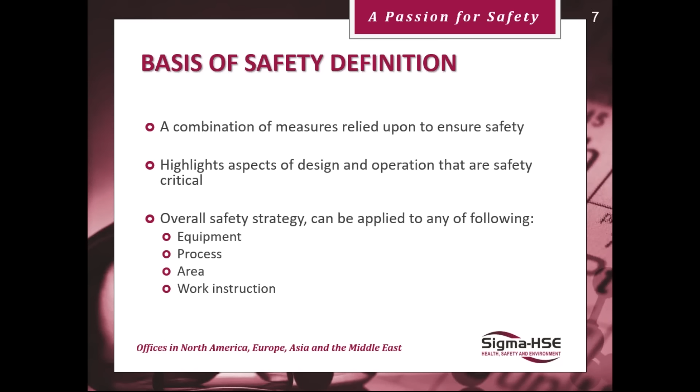The area where you're working, is it a hazardous area? It will be if you're dealing with flammable materials. We have to look at what type of area it is. Is it a zone 0, zone 1, or zone 2, which are designated in the EU? Do you provide work instruction? In other words, do you have SOPs, etc., for your workers so they thoroughly understand what the process is about?

So in order to build our basis of safety, it is necessary to have the following information available. You must have information on the equipment specifications. How fast does the machinery go? What sort of temperature does it reach? What is it made of?

Operating procedures, as I said before, are very important to ensure that staff understand what they're doing with the process. Hazardous area classification - is it a very high risk area, such as a zone 0 or zone 20, or is it less dangerous, a zone 2 or 22?

What sort of maintenance procedures do you have in place? Do you wait for something to go bang, or do you have preventative maintenance in place to ensure the system works to a high level at all times?

What type of materials are being handled? You'll probably have materials which you regard as not being particularly dangerous, and you may have other materials which you look at and say these are very toxic, for instance. But some of these materials that are not particularly dangerous from the point of human health may be dangerous from fire explosions, such as sugar, flour, etc., food materials.

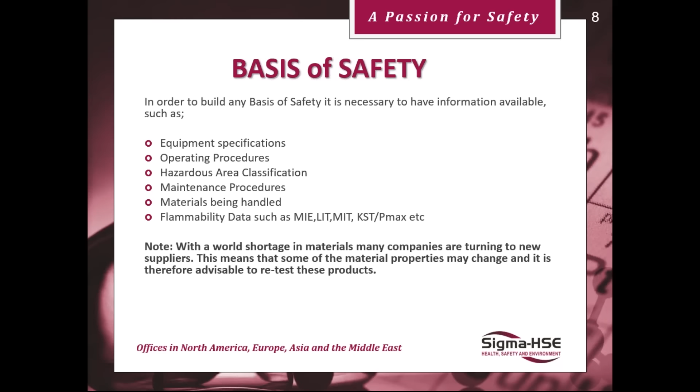So, first thing is equipment. If you look at the equipment, you have to consider what type of ignition source can it provide: mechanical, electrical, electrostatic, etc. So the equipment that you're looking at must be suitable for use for the product you're working with. So does it fit into your zoned area okay? Or is it a piece of equipment which is not EX rated, for instance? So having a knowledge of your equipment is very important.

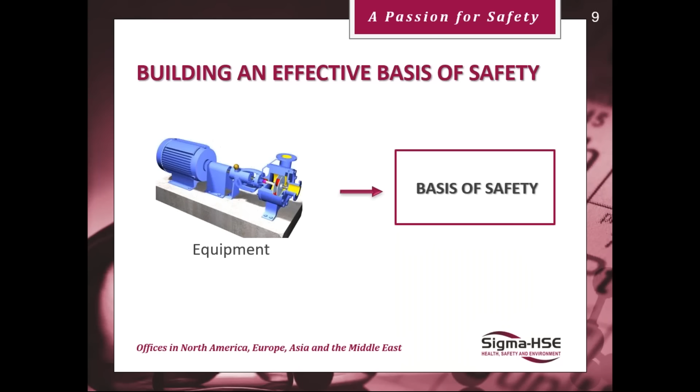Procedures, operational and mechanical. You need to know how to operate your process, and the people pushing the buttons and pulling the levers have to know why they're doing it and at what time they actually do some of these things. They must know something about the materials themselves. So you have to let them know if a material is particularly toxic or hazardous from the point of view of fire and explosion, and what you're doing about it as well to ensure their safety.

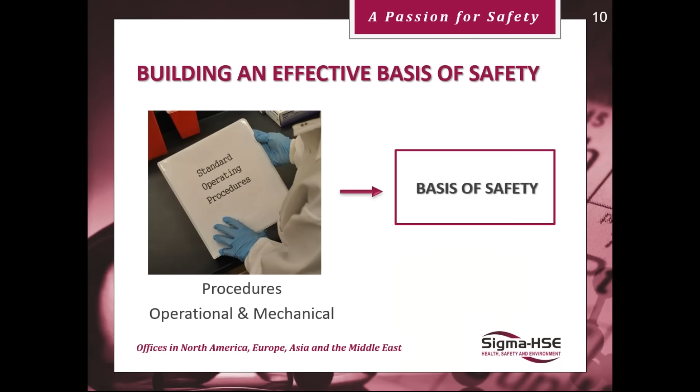Deviations are something we come up about quite often. You may deviate from a normal operating process because you say to yourself, well, we're doing a short run, so we want it done today. We're going to increase the pressure, or we're going to increase the rate of fill, or we're going to increase the temperature. If you're going to do these things, then you have to look at it before you do it, to make sure that your basis of safety is still effective.

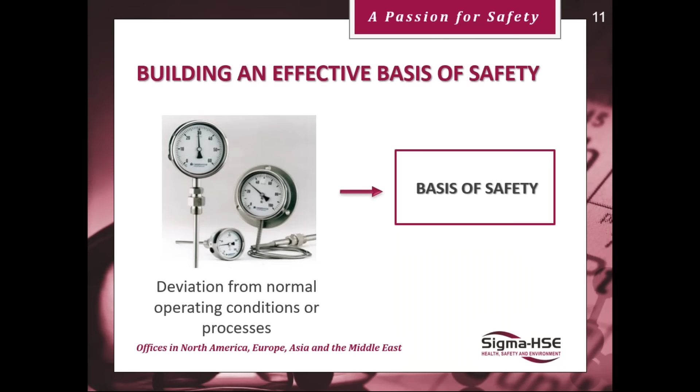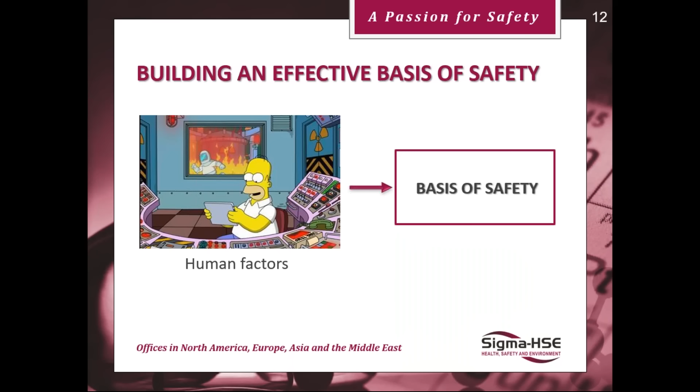Human factors. Human factors are sometimes a big problem. Humans can do very good things. They can smell burning. They can hear a machine's not going right. And they can identify this to people and say, we need to shut the process down before harm is caused. On the other hand, they can do the most stupid things you could ever believe in your life. So looking at human factors, you have to consider what you've got in place to mitigate the effects of the human being in the system.

Material properties. Not just the flammability of the materials need to be considered. Are they corrosive? Are they toxic, for instance? If they're toxic, and I've come up against this on several occasions, people have put explosion vent panels in with a toxic material, and they could fire it straight across the public car park outside the building. So you need to know other properties, not just the flammability properties, before you decide to choose an effective basis of safety.

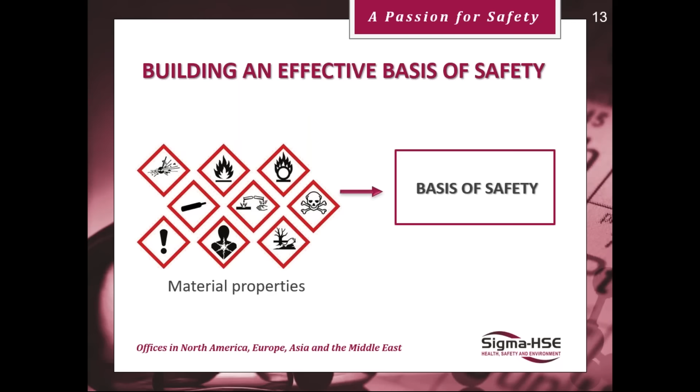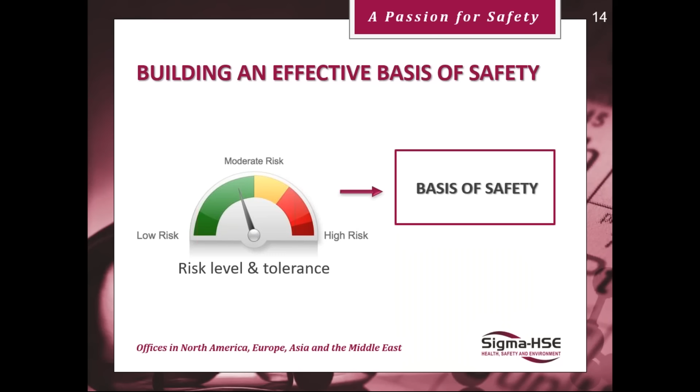Risk level and tolerance are another thing you may need to look at. If your factory is located in the middle of a city or town, and people are going by it every day, then you may say to yourself, an explosion vent panel going off all the time is not something that they want to hear. And before long, you'll have the local authorities on you wondering what's happening. Whereas if you're in the middle of a greenfield site, far away from people, it doesn't really matter whether you have an explosion or not out there from the vent panels going off. If the vent panels go off, there's no one around to hear it except for your workers.

There's many more other things to take into consideration when you're looking at this. So please don't just think about these ones that I've talked to you about. Look at other ones that may be around that could have an influence on your defined basis of safety.

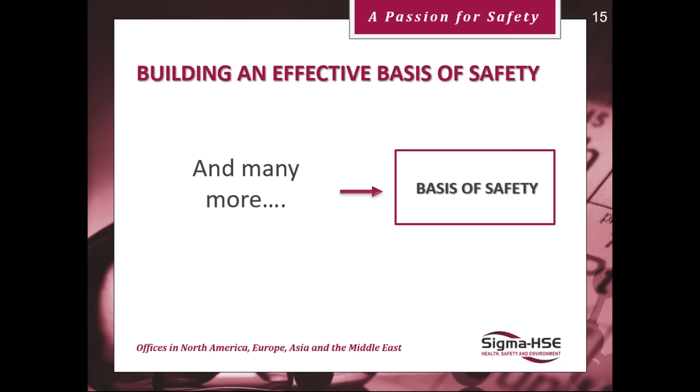Now we're looking at fires and explosions. And looking at this, there are three types of basis of safety to look at these risks.

We could look at explosion prevention. We could achieve this by avoiding flammable atmospheres, either by not using flammable materials, using them outside their flammable range, or introducing inert gas such as nitrogen to make sure the atmosphere is non-flammable.

We could look at avoidance of ignition sources. To do this is very difficult. You have to take into consideration absolutely every type of ignition source you can think of that's there, and you have to be honest with yourself when you do this. Don't try to pretend that you can do something if you haven't got the data to prove it.

Explosion protection - this is quite a common way of dealing with things. Put in an explosion vent, for instance. But as I said before, this may reduce damage to plant and employees from the explosion, but you also may blast out toxic materials over your employees' car park.

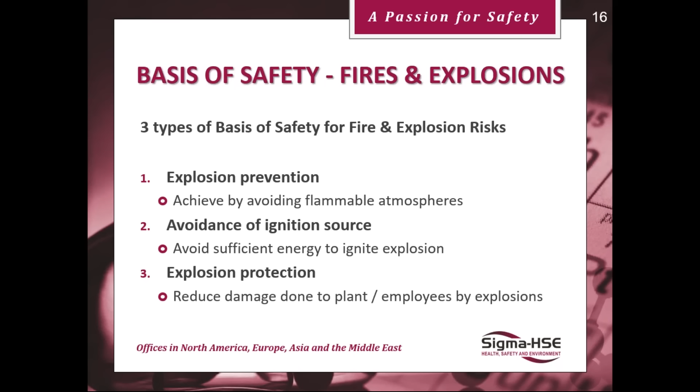So how do we get a dust explosion anyway? We don't hear about them that much, even though we know there's quite a few go on, and the companies don't want anybody to know about it. Therefore they're kept quiet - it's only the very big ones you tend to hear about. But in order to get a dust explosion, the dust must be flammable, combustible, and airborne to form a dust cloud. So these are the main factors you need to look at - it must be flammable or combustible, and it must be airborne in order to form a dust cloud.

Concentration must be within explosible limits. Now when we talk about gases and vapors, we talk about the LEL or LFL, the lower explosion limit or the lower flammable limit. And we also talk about the upper explosion limit and the upper flammable limit. Now we normally believe that within these levels, the gas or vapor will be flammable.

Outside, it will not. When you look at dusts, we have a lower limit, the minimum explosive concentration, but we never use the upper limit. That is because, unlike gases and vapors, dusts settle, and as the dust continues to settle, so it goes into the flammable range. Therefore it's very difficult to use this value. So we only work on the MEC, minimum explosive concentration, and if we keep below that, then there won't be a risk of a dust cloud explosion.

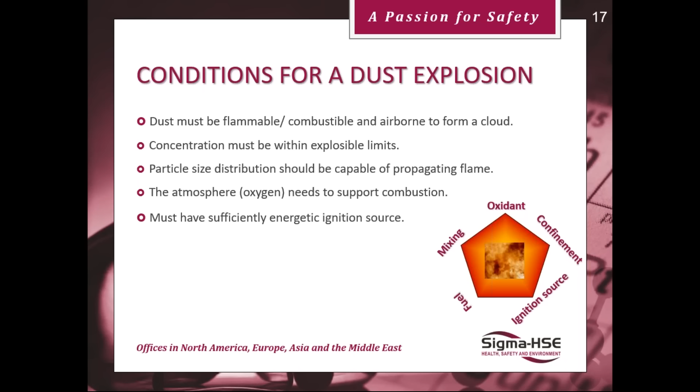But how do we get an explosion? This is the fire triangle. Well, we have a pentagon. And now we need to mix the fuel in the air. So if it's airborne, this is exactly what you get - you get the fuel with the air mixed in with the material. And on top of that, we need to confine it. When it's confined, then you will get the explosion. Without the confinement, you would just get a fireball. So we put those things together, and we stand the possibility of having an explosion.

So I talked about properties, we talked about toxic, we talked about corrosives, etc. But we also need to look at flammability. Why is this important? Well, unless we know what the material does, how are we going to build our basis of safety?

So you need a good understanding of the explosive properties of the material. You need to know how sensitive they are to ignition. You need to know how powerful the explosion is if you're using vents. It helps you determine whether you can stay outside the flammable limits, working below the MEC. And another fact, last year in 2021, it became a legal requirement on European safety data sheets to put data about flammability and potential explosion properties.

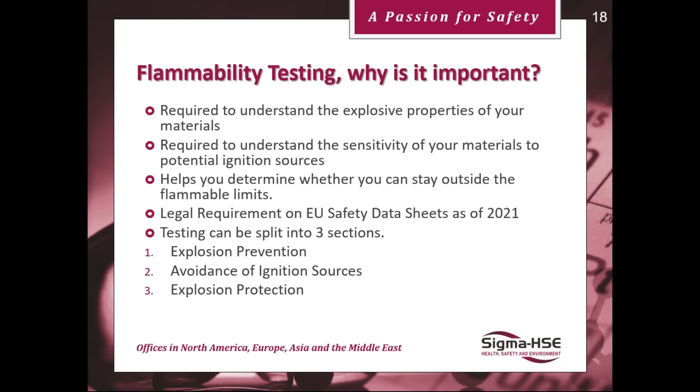Testing can be split into 3 sections, so you don't need everything, you need it to prove your basis of safety. So we talked about explosion prevention, avoidance of ignition sources, how sensitive a material is, and explosion protection, how powerful the explosion is.

The change in the EU safety data sheet is Annex 2 of REACH, and that has been amended concerning the compilation of safety data sheets as from the 1st of January 2021. So, as from then, it is now a legal requirement to include data for flammability. This could be MIE, LIT, MIT, PMAX, KST, the lower and upper explosion limits.

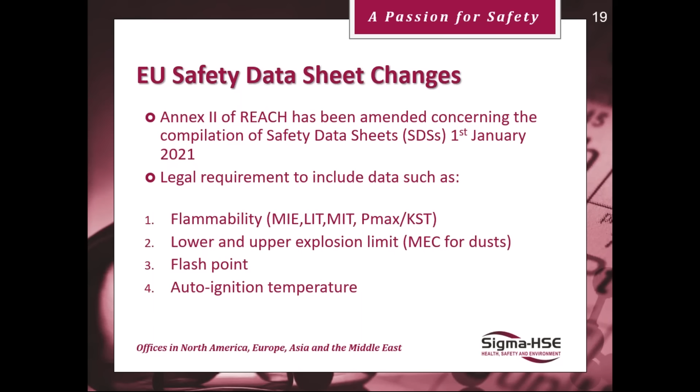So as said, for powders and dusts, we just need the MEC. And then the old ones, which are always on there, for gases and vapors, flash point and auto ignition temperature.

Now, dusts and powders have their own set of tests and values that you need to look at, different to gases and vapors in many cases. The most common one that we would test for is minimum ignition energy. This looks at the risk from electrostatic spark discharges and mechanical spark discharges.

The minimum ignition temperature considers hot surfaces, electric motors, for instance, grinding sparks, that type of thing. Layer ignition temperature considers, again, hot surfaces, so you may have dust settling on things like electric motors. You need this data to make sure that the rating of the electrical equipment is safe.

And then you've got maximum pressure, PMAX, KST, ST class. These ensure explosion protection is safe and usable. The minimum explosive concentration considers the flammable range, as I said before. Limiting oxygen concentration considers inerting.

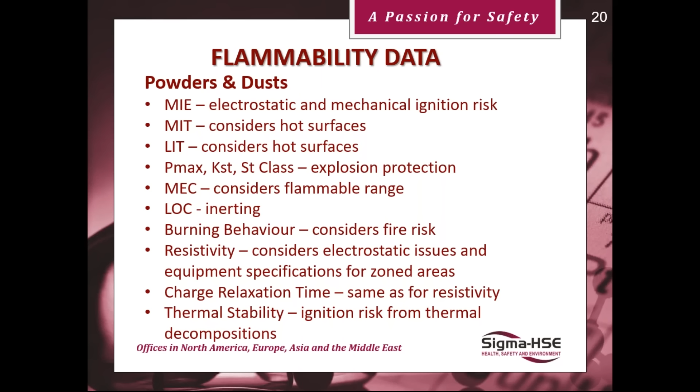And then something happens, like a piece in the process stops, and the material's held there for longer than normal, and before you know it, they've got a decomposition. If they'd have had the data, they would have known the risk of working with the materials.

So the first one we're going to look at now is explosion prevention. Is the material flammable? Well, the Group A/B classification test will tell you that. There's the rig on the right-hand side there. We disperse the dust up into it, and we put a constant arc ignition source across it. This will tell us, is it combustible group A, in which case we have a problem, or is it non-combustible group B? If that's the case, you don't have to worry about it. Therefore, none of this has to be looked into.

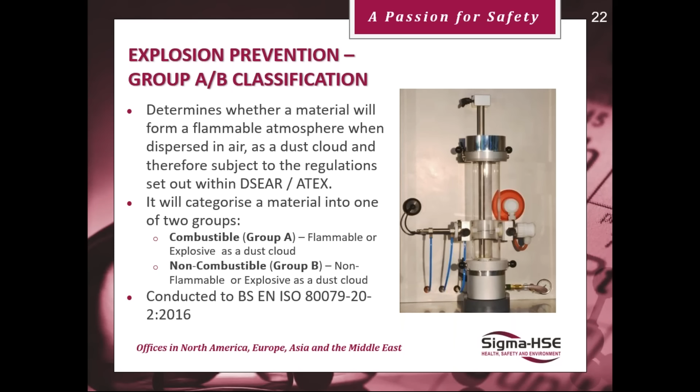It's conducted under BS EN ISO 80079-20-2 from 2016, this test.

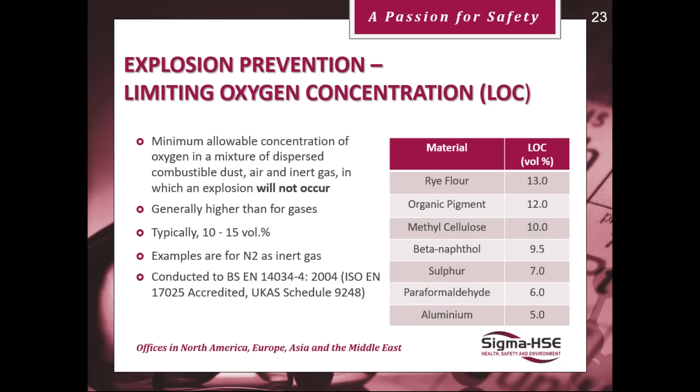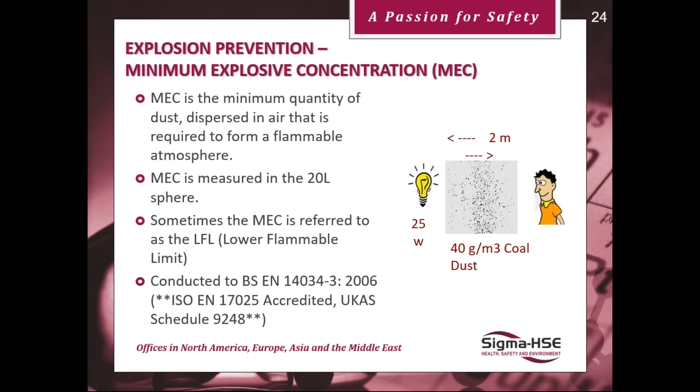You could go below the minimum explosive concentration. The MEC is the minimum quantity of dust dispersed in air that is required to form a flammable atmosphere. MEC is measured in the 20-liter sphere, the same piece of equipment that we use to measure explosion violence. Sometimes the MEC is referred to as the LFL, but keep to the MEC because this is specific for dusts. On the right, you'll see 2 meters away from a 25-watt light bulb you can't see, and that's 40 grams per cubic meter, but we've had materials down to 15 grams per cubic meter. So please be careful with the MEC and make sure you know it for your finest material.

The next basis of safety is avoidance of ignition sources. EN 1127 gives you 13 types of ignition source. We're only interested really in 5 of these, unless you're in a very specific type of industry. So hot surfaces, flames, smoking and hot work, mechanical friction and thermite sparks, electrical apparatus, static electricity. They're the ones we tend to look at in detail. Some of the others may be around, such as exothermic reactions, etc., or stray electrical currents, and they obviously have to be taken into consideration. But the big 5 are what I told you about. They're the important ones to consider first, but don't ignore the rest.

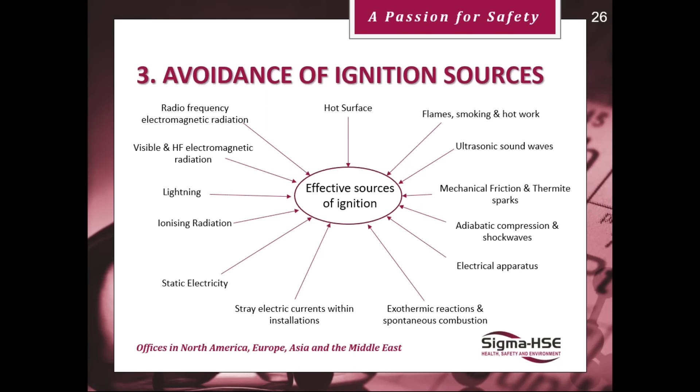So for statics, we look at the minimum ignition energy. This is the lowest spark energy that can ignite the optimum mixture of fuel when dispersed in air. So this is the lowest energy that will ignite the optimum dust cloud. So if your dust cloud is not at optimum, it will take a higher energy to ignite it. So this is worst case. We use a purely capacitive discharge when we consider electrostatics. If we're looking at mechanics, then we look at inductive discharge, where a 1 millihenry inductor is put in before the earth. This elongates the time of the spark and mimics what goes on a mechanical spark.

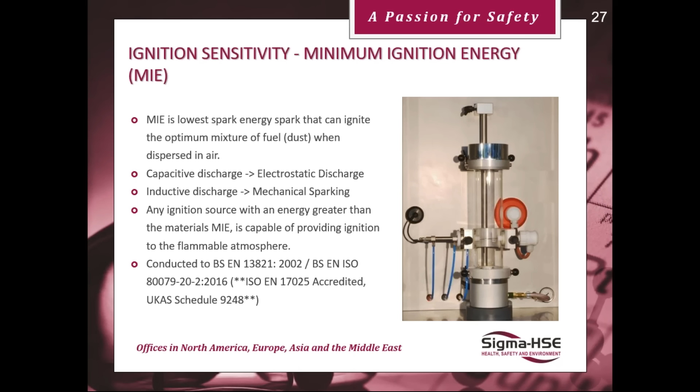Any ignition source with an energy greater than the material's MIE is capable of providing ignition. You can see the standard underneath. I'm not going to read all through that.

So typical values: starch 100 to 300 millijoules, glass reinforced plastic dust 30 to 100, sugar 10 to 30 millijoules, though this works on the finer the material, the lower the MIE. And in some cases, for very, very fine sugar, it can actually drop below 10. Aluminium in fine form can be 3 to 10 millijoules. And if you take a material less than 10 micron in particle size, it can be as low as 3 millijoules. If it's 150 micron in particle size, the MIE may be 250. So you can see particle size plays a big part.

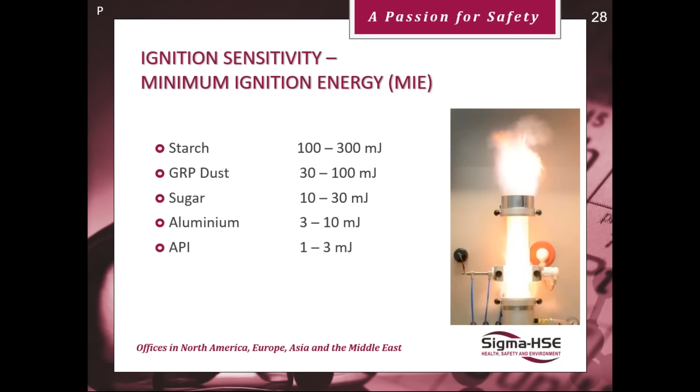Active pharmaceutical ingredients, they can be some of the worst. They can actually be 1 millijoule, the same as gases and vapors. So be very careful when you're looking at avoidance of ignition sources or considering a process. Get your minimum ignition energy so you know what you're risking.

We also look at hot surfaces. The minimum ignition temperature looks at the effects of hot surfaces on a dust cloud. You can see the furnace there clearly and the flame coming out at the bottom, where the material is dropped into the furnace and the dust cloud ignites and causes the flame.

MIT is the lowest surface temperature that can ignite the optimum mixture of fuel when dispersed in air. MIT is equivalent to the auto-ignition temperature for dusts, but be aware you may also use the LIT for this, unlike gases and vapors, which just have an AIT. It's used to calculate the maximum permitted surface temperature of equipment.

The range of the equipment runs from about 200 up to 700 degrees. And again, we do this test in our UKAS accredited laboratory to the standard shown there.

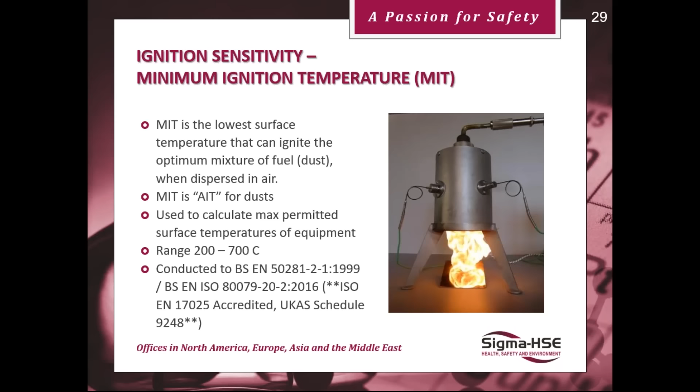The other test we use for hot surfaces is the layer ignition temperature. LIT is the lowest surface temperature that can ignite a 5 millimeter layer of material. In America, they use 10 millimeters, which gives you a lower value. Personally, I'm with the European version, which uses 5, because you shouldn't have that deep a buildup of material on your equipment. In fact, you shouldn't even have 5 millimeters of material on your equipment, so I would rather see a thinner layer than a thicker layer being tested.

It's used to calculate the maximum surface temperature of equipment, and we use it with the MIT value. The range of this equipment is 200 to 400 degrees, and again you can see the standards we test to.

We also can test, by the way, for any of these tests to the American standards, if necessary, the ASTM, if necessary.

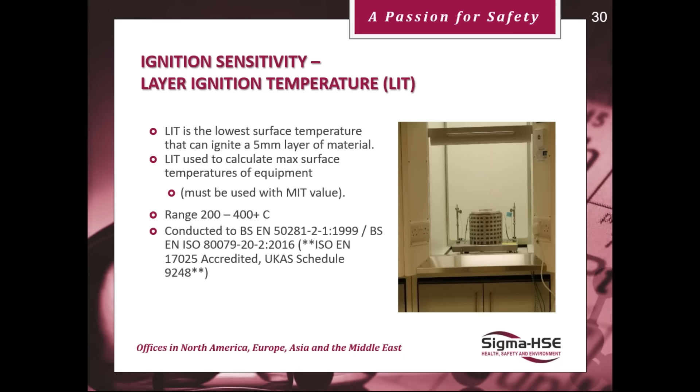So what are the common ignition sources? Electrostatics - some dusts have very low MIE values, less than 1 millijoule, therefore these are very high risk when you're working with them. Other materials may have higher MIEs, but they may still present a problem because you may have ignition sources of a greater energy than the MIE.

Flames and hot work - risk is high and ignition will depend on the MIT of the dust. So if the dust hits a hot surface, for instance if someone is welding on the other side of the vessel which has a dust cloud in it, it could create an explosion. I've seen several examples of plants being blown up due to this type of thing happening.

Hot surfaces - risk is moderate as many values of MIT and LIT are quite high, although some materials do have much lower values, such as sulfur or sulfur salts. Therefore, hot surfaces are still a risk, and you'll need to ensure that your electrical equipment surface temperature is lower than their lowest ignition temperature.

Electrical sparks - I've seen properly selected electrical motors or equipment being fitted in areas, and then the wiring has been absolutely awful, with open connection boxes with open access for dust to get in, inline connectors which are not IP rated, etc. So it's not just the electrical equipment, it's the wiring etc. that has to be considered for the case of electrical sparks.

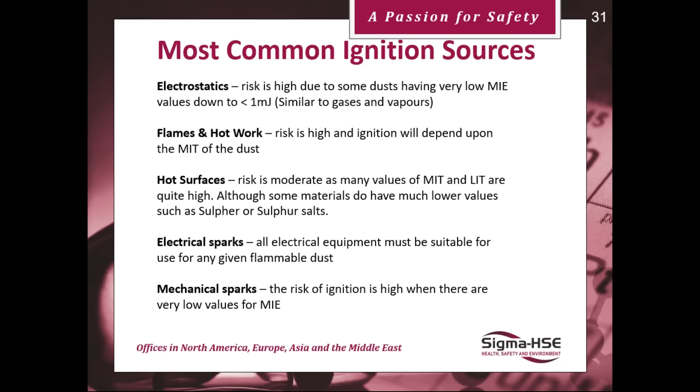Electrostatics - lots of problems with electrostatics where people don't understand them, do an item where they change the process thinking it's going to improve it, but in fact they make it worse. So having a knowledge of electrostatics is always advisable. If you have problems, come to a company like us, and before you do the change which could affect the electrostatics, why not talk to us? We may be able to help you.

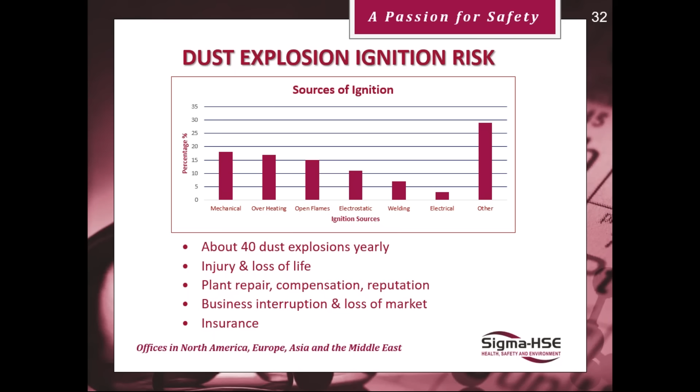But what you do know is there's about 40 dust explosions a year with injury and loss of life. It results in plant repair, compensation, and your reputation being damaged. It creates business interruption and a loss of market product. And of course, you've got to tell your insurance company - they may not be too happy to insure you next year.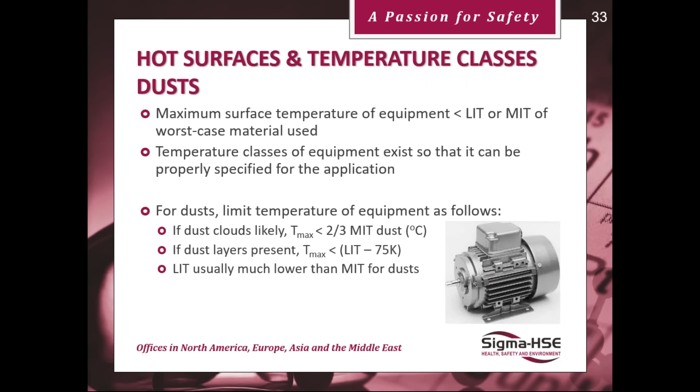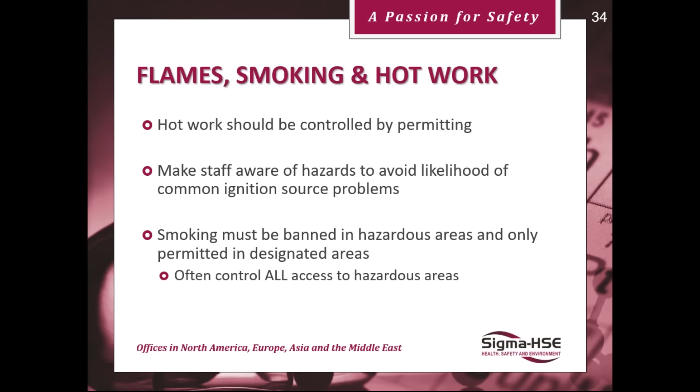Flames, smoking, and hot work. Well, today, hot work should be controlled by permitting. This is common in most industries and should be taken up if you're not doing it. Make staff aware of the hazards, avoid a likelihood of common ignition source problems. Smoking nowadays is banned in hazardous areas and only permitted in designated areas, and staff must understand this. Often control all access to hazardous areas. In other words, only allow certain people into these areas who have been trained to work in hazardous areas.

Electrical equipment for dust. Well, electrical apparatus in hazardous areas must be suitable for use. It must be looked at the MIT and LIT for the surface temperature. You must know the classification or zone of the area. Is it a zone 1, a zone 0, a zone 2, or for dusts, is it a 20, 21, 22? What's the ingress protection rating? Make sure it's suitable for working in a dust atmosphere.

And the type of powder. Is it conducting or insulating? Both of them provide problems. If it's conducting, then you have to be careful - you could get a short on your electrical equipment. If it's insulating, it could provide electrostatic sparking problems.

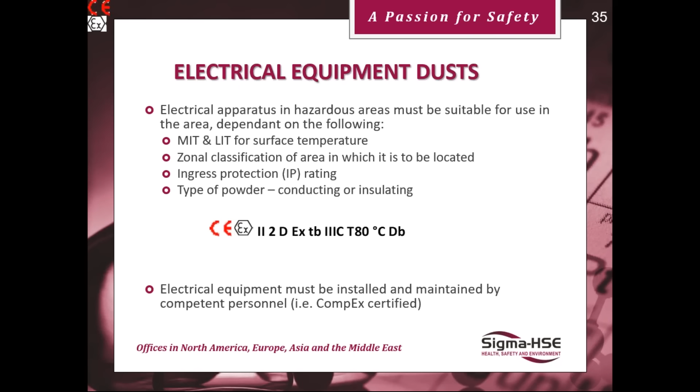So that is now within the EU. We have D for dusts, DA, DB, and DC. The electrical equipment must be installed and maintained by competent personnel. We recommend CompEx certified people.

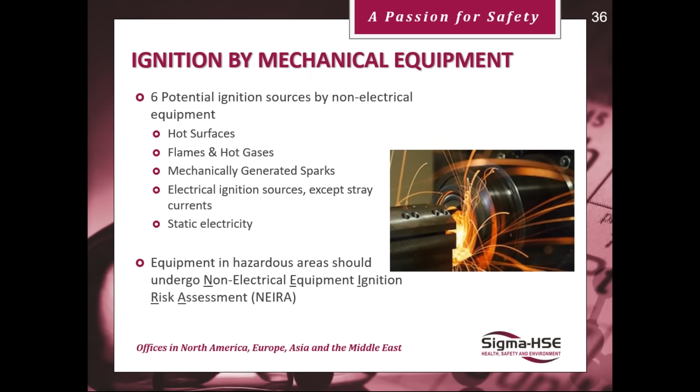Ignition by mechanical equipment. Six potential ignition sources: could be hot surfaces, could be flames and hot gases, could be mechanically generated sparks, could be electrical ignition sources, except stray currents, could be static electricity. If you're using equipment which may be mechanical and have the potential to create sparks, then you need to do a non-electrical equipment ignition risk assessment. In short, a NEIRA. We recommend you do this and make sure your equipment is safe. Mechanical is quite a high risk of an explosion happening.

So how do you prevent mechanical sparking? Reduce the energy to lower than the MIE by using, say, slower rotating equipment. Don't allow tramp metal and foreign bodies into the equipment - make sure you have a way of removing them or preventing them getting in. Have externally mounted bearings and seals rather than internal ones. Control material feed rates - don't have them coming in too fast. Monitor the temperature of your bearings, etc., so you know if a problem is going to occur. And make sure you have a maintenance, inspection, and lubrication system in place.

Preventative maintenance - don't wait for something to go wrong. And make sure you have good housekeeping. Clean up the dust around the area and make sure there are no layers or dust clouds outside the equipment. The photograph you see is one I took on a food manufacturing plant. They didn't know that their material was hitting, their blades were hitting the end of the dryer. And if you look there, you can see clearly the score marks going round, which could create a mechanical spark.

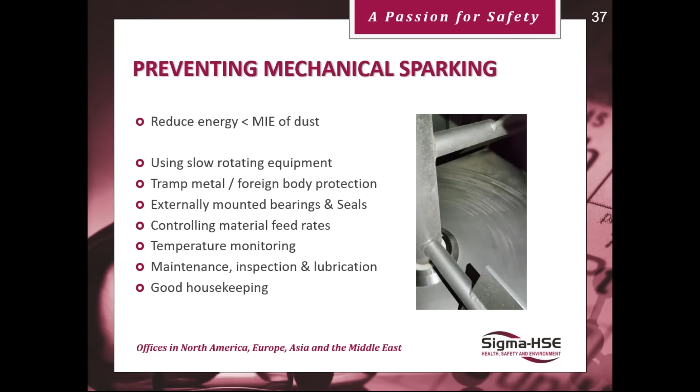So the typical risk assessment for a NEIRA: look at the CE markings, understand the IP ratings, know the speed of the moving part, what is their rotational speed, and check earthing. Is there good earthing on the plant, and have you made sure that all parts of the plant, including the rotating blades, are earthed properly?

What are the materials of construction? Are they steel, aluminium, a mixture of both, phosphor bronze, brass, etc.? Look at the temperature rise and the rating of the equipment for temperature. Emission of sparks, can this happen?

Selection of materials to avoid electrostatic charges. Try not to use highly insulating blocks of material that could result in isolated conductors, for instance. Avoid frictional contact between steel and certain alloys. If you have rust present in any shape or form, you can get a massive spark out of it, and this could be well over a joule. So be careful when using steel and certain alloys, such as aluminium.

Minimize the leakage of dangerous substances from the equipment, and look at the effect of dust layer on temperature rise. Make sure you've got operating procedures in place. Again, maintenance: make sure maintenance understands the issues with the piece of equipment and maintain it accordingly. Look at the operating environment you're working in.

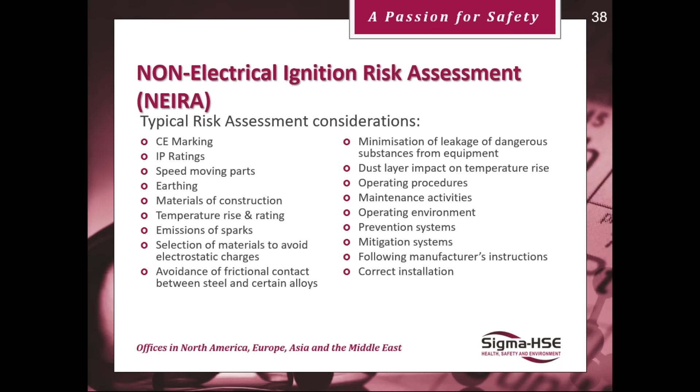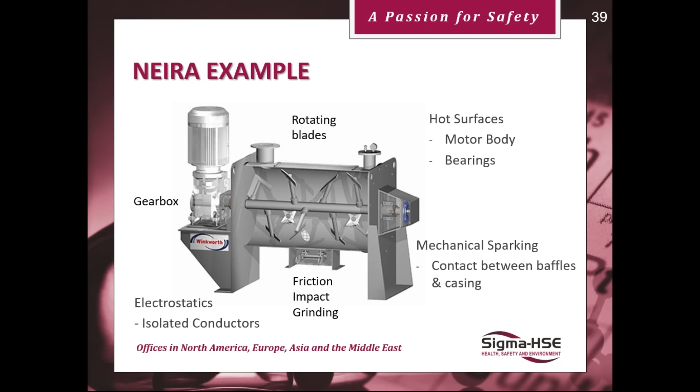This is just one of many types of equipment you could have around, and here's an example of where you could have problems. The gearbox on the motor could overheat. Electrostatics, creating isolated conductors. Rotating blades, providing friction, impact, or grinding sparks. Hot surfaces on the motor body and bearings. Mechanical sparking, contact between the baffles and the casing. They're just a few that you would look at when you're doing an NEIRA.

Looking at static is one of those which are regarded as the black art. Some people think they understand it, some people actually do understand it, but as I say to people, a little bit of knowledge is a dangerous thing. So unless you know properly about static, leave it to the experts to consider it. It's the only ignition source explicitly mentioned in the Dangerous Substances Explosive Atmospheres Regulations for the UK and ATEX within Europe.

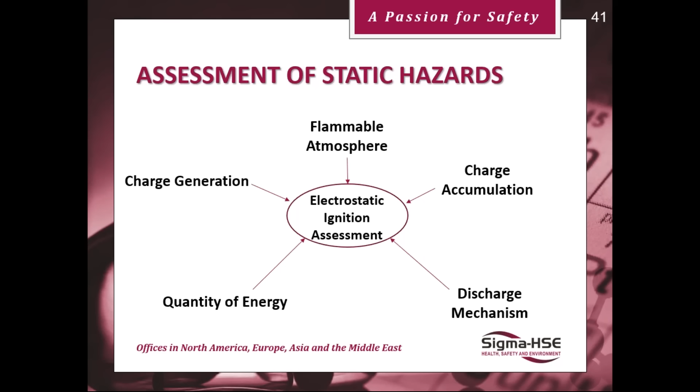So if we're doing an electrostatic assessment: is there a flammable atmosphere? Can we get charge generation? Movement creates charge. If we get generation of charge, can it accumulate? How much energy can it accumulate? And how does this discharge? Does it discharge via a spark or like a cone discharge, for instance? So having an understanding of these properties will let you know whether you have a high-level static hazard.

If we look at the different types of discharge mechanism, we have corona discharge, the sort of thing you hear when you walk past an electric pylon. It comes off a sharp point of earthed conductor, or very close to a highly charged object. It's about 1 to 2 millijoules. So it's non-incentive for dusts unless it develops into a spark.

Brush discharges: take your jumper off at night, a nylon jumper, you'll see those little sparks. They're 3 to 4 millijoules of energy. So charged insulators are discharged to an earth conductor. Gases and vapors can be ignited by these, but now they understand that dust cannot be ignited by brush discharges.

Spark discharges are the most common. These come from isolated conductors and they go to earth. Calculated energy, half CV squared, normally between 0 and 100 millijoules. All gases and vapors can be ignited along with dusts and mists, where the energy is greater than the MIE.

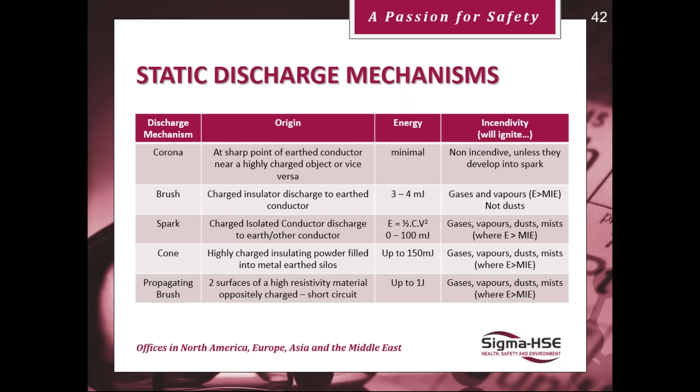The explosion blew the whole pipework off and blew over the actual tanker that was discharging the plastic. Gases, vapors, dusts and mists again, energy greater than an MIE. So propagating brush discharge is the one you want to try and avoid.

So, summary of avoidance of ignition sources. Consider the five we talked about most: hot surfaces, flames, hot work, electrostatic ignitions, mechanical ignitions, electrical - those are the most important ones, but don't ignore the rest from the thirteen.

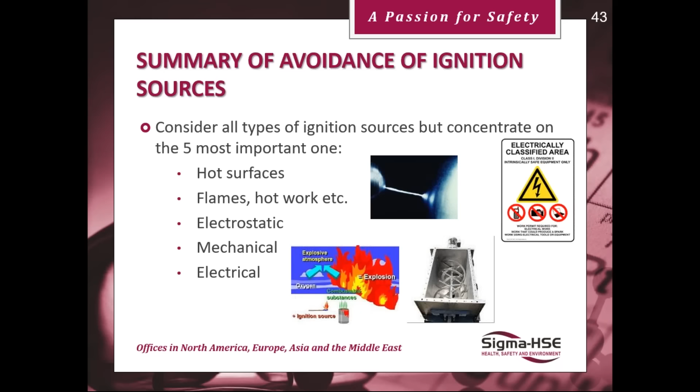Perform hazardous area classification, making sure all equipment is suitable for use in that zone. Consider more detailed assessments for electrostatics, looking at electrical equipment and mechanical equipment. Control all naked flames and hot work by permit systems, and obtain suitable flammability data on your products. If you change your products or provider, get the data again, please.

Then you can understand if a potential source of ignition can become active and effective. If it becomes active, is it effective? And then you have to write a detailed basis of safety report covering everything you found.

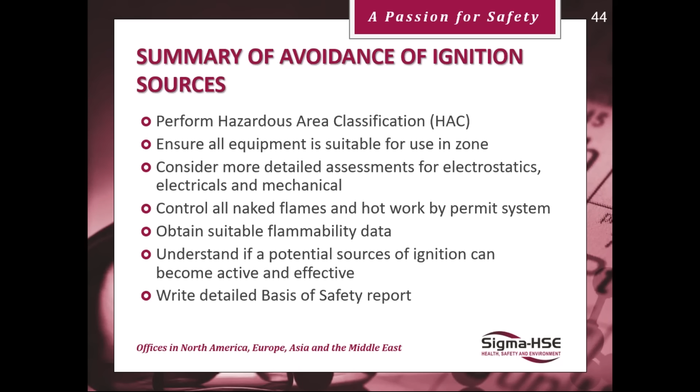The final one we're looking at is explosion protection. This is quite often used in industry as a cheap and easy way to protect the equipment, to save you losing the equipment and harm to people.

In Imperial Sugar, this happened in 2008. This is sugar - you can see the state of the building. As I said, some things you don't think are dangerous, but this is what sugar did: 14 deaths, 38 injuries, an explosion fueled by accumulations of sugar dust, but they allowed propagation throughout the building.

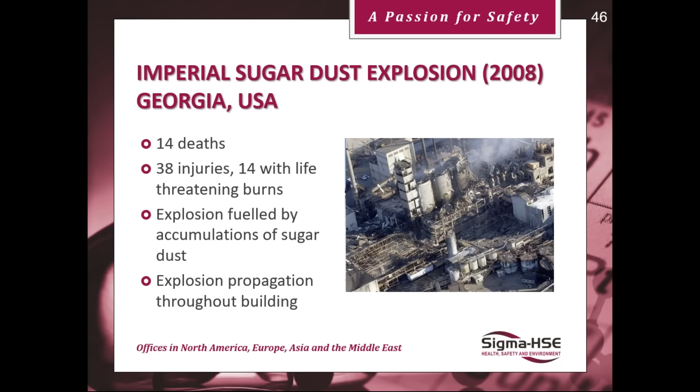Poor housekeeping, no isolation, so the explosion propagated throughout the building, with the explosions getting larger and larger as the material exploded further on down the line. These are what we call secondary explosions.

So the 20-litre sphere is what we test on - there's one on the right. This gives you the maximum explosion pressure. The dust constant, K-ST - ST is Staub, German for dust - is calculated from the maximum rate of pressure rise in the sphere and transferred over to what it would be in a 1 cubic meter vessel.

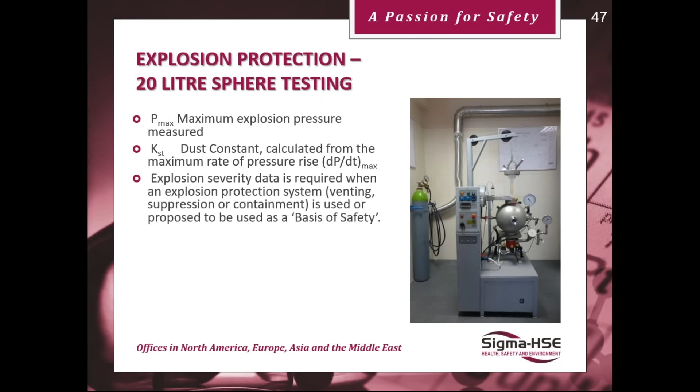Now, you looked at the sugar explosion in Georgia there - this says weak explosion. So please believe me that a weak explosion can take out your factory. This could be powdered milk, charcoal, sulfur, sugar, zinc, wood dust, any of those things.

ST2s are the next highest up, 200 to 300, described as a strong explosion - cellulose, wood flour, polymethyl acrylates, etc. And the big boys, the ST3s, greater than 300, no upper limit, very strong explosion - anthraquinone, aluminium about 650, magnesium, aluminium lithium hydride 1200, hydrogen air 550. Now you get to see what a dust explosion can do.

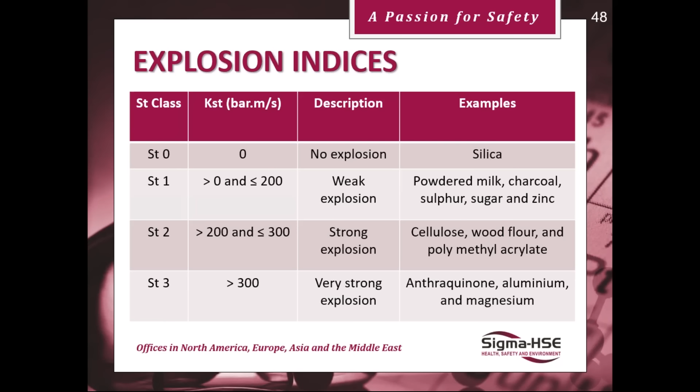If you're using explosion protection, you must look at mitigation of risks: reduce the number of employees, avoid propagation of fires and explosions, unlike the sugar explosion we saw. Look at explosion relief arrangements, take explosion suppression into consideration, or you may decide to take containment. Personal protection equipment may be required.

If several dangerous substances are present, then you design your system for the worst case. And look at safe handling, storage, and transport of dangerous substances, and include the waste into this - too many people tell me this is just waste.

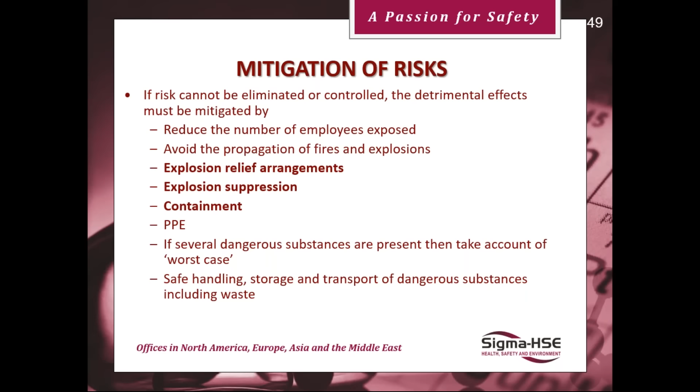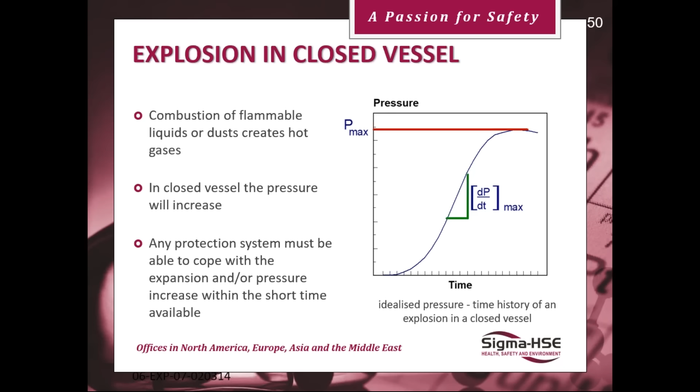If we look at containment, isolate pieces of equipment where explosions could occur. All isolated plant must withstand the overpressure of the explosion. Good things about it: no release of combustion dust products or toxics, no requirement for provision of a safe area.

On the other hand, the equipment can be very expensive to build, and it must be maintained over its lifetime. The people who maintain it have to understand there are 27 bolts around it because it is a containment vessel, not just to stop a leak. Requires pressure testing and the documentation to go with it, and the equipment is extremely heavy.

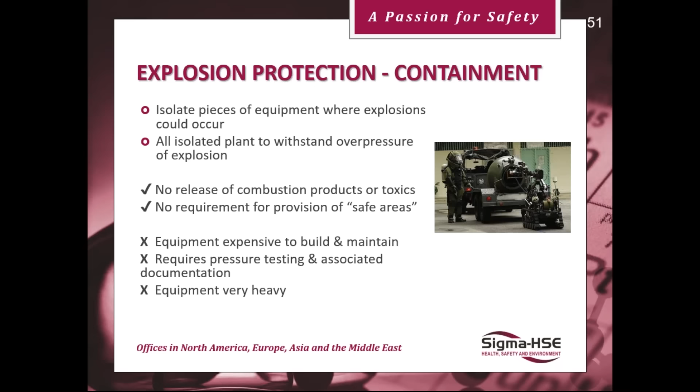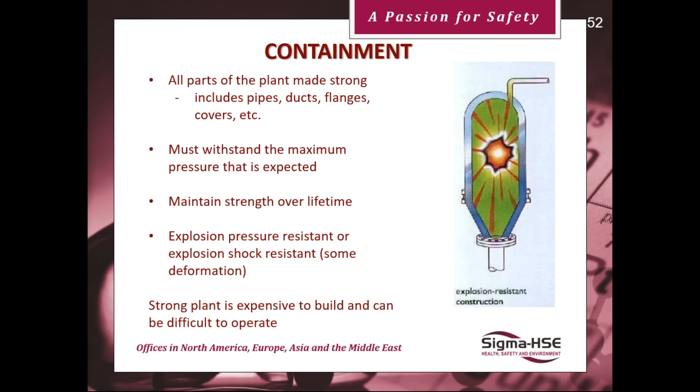With containment, all parts of the plant must be made strong, including any pipes, ducts, or flanges which are included, must withstand the maximum pressure that is expected, and must maintain the strength over its lifetime. Must be explosion pressure resistant or explosion shock resistant. And always remember, a strong plant is expensive to build and can be difficult to operate. It's not as simple as you think.

The most common way we use is venting. This protects plant and personnel from the effects of an explosion. It has a controlled release of pressure via weak openings, such as the vent panels. Vent sizing is designed by Kst and dP/dt max 20-litre sphere data.

Good things: gives the ability to control release location, uses passive protection systems, can be retrofitted to weak vessels. However, combustion products and overpressure can be released, and non-flameless systems lead to explosion propagation.

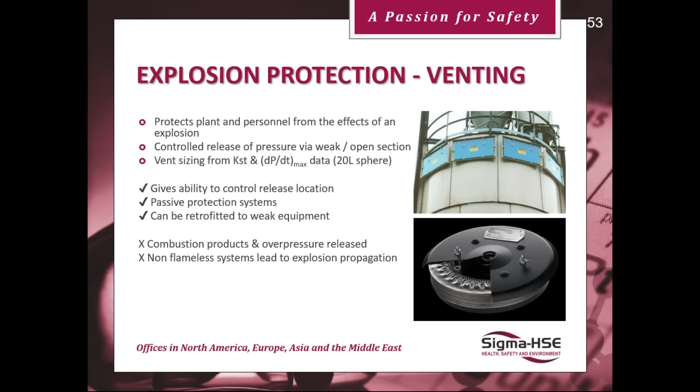Advantages: can be designed in-house, cheap to vent, needs little maintenance, very wide range of application. Disadvantages: the material is released into the atmosphere, unsuitable for materials that are toxic or corrosive, must discharge outside the building, restricts the siting of the plant item to an outside wall, and you need a large safe area for the explosion vent to operate.

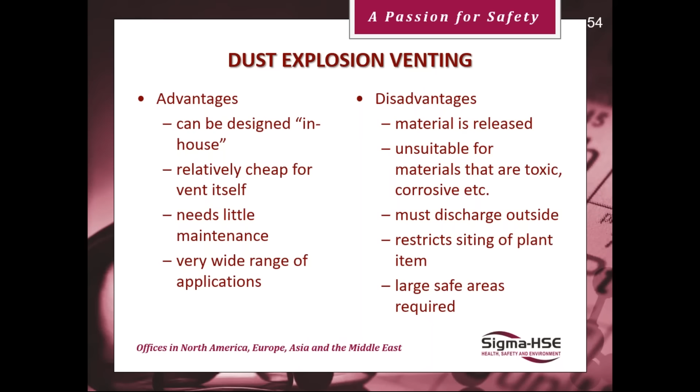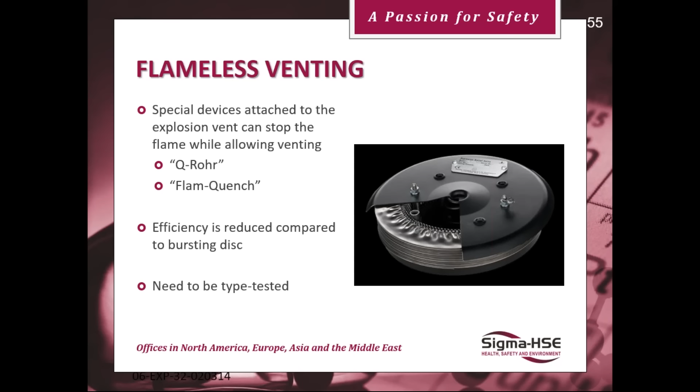A common thing happening today is flameless venting. These are special devices attached to the explosion vent that can stop the flame going outside. Q-Rohr, Flam-Quench, a couple examples. The efficiency is reduced compared to a burst disc, and they need to be type tested.

Flames are prevented from exiting the vent, but high pressure and smoke can still fill the workspace and can still happen around the area. They require regular maintenance, and they must be suitable for materials being processed if they're toxic. Caramelization - I saw one where they were using sugar, and when they took it apart, the whole flameless vent was stuck together with caramelized sugar.

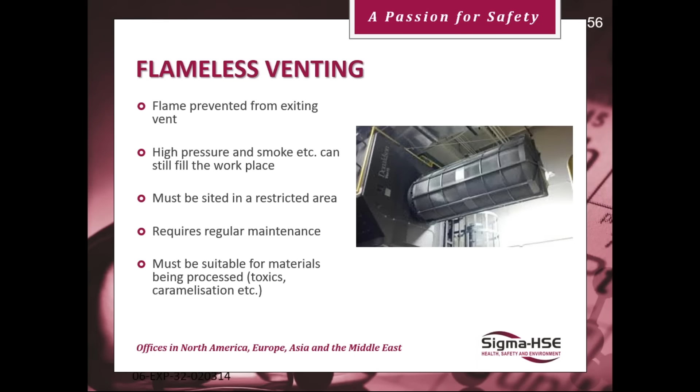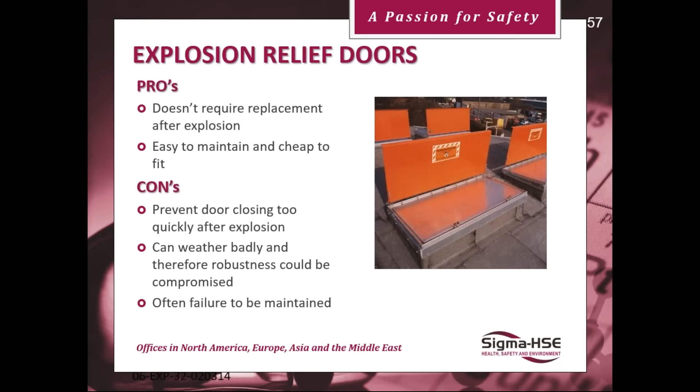So if you have a material which does that type of thing, then reconsider whether you can use flameless venting. Sometimes they use explosion relief doors. Useful - they don't require replacement, easy to maintain and cheap to fit. Problems you get is the door closing too fast after the explosion. They weather badly, and therefore they're not often as good as when they were first fitted, and often there's a failure for people to maintain them properly.

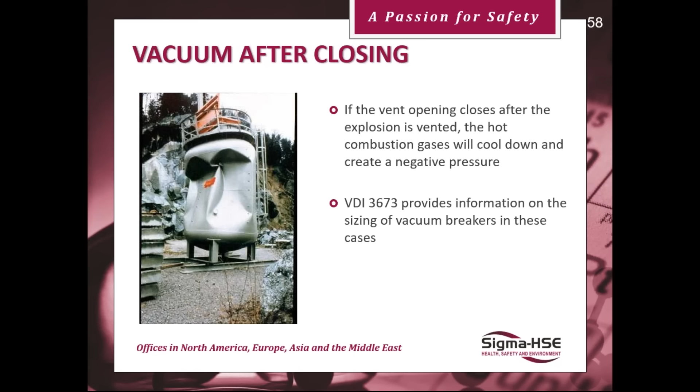If the vent opening closes after the explosion, then you get a vacuum formed as it cools down. VDI 3673 provides information on the sizing of vacuum breakers for this type of case, so don't let the door close too fast.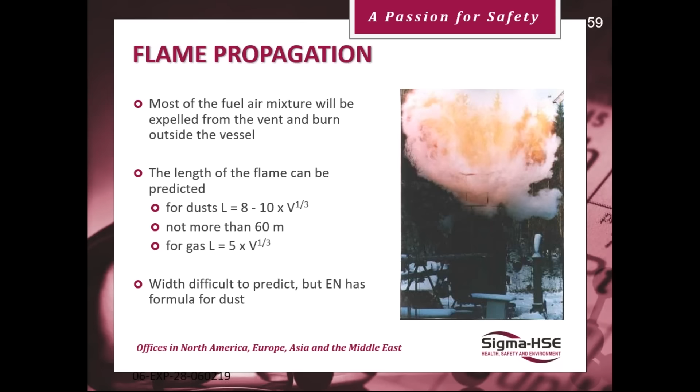If there's outside dusts which are in the air, then the flame could come out and ignite those. Some of the things we see: leaking, badly maintained vents, covers on them to stop water ingress.

Explosion protection suppression - this is often used on plants where you have toxic material. They extinguish the explosions in the early stages, via injection of pressurized suppression agent at a given point. Good things: no external effects of the explosion, suitable for use with toxics.

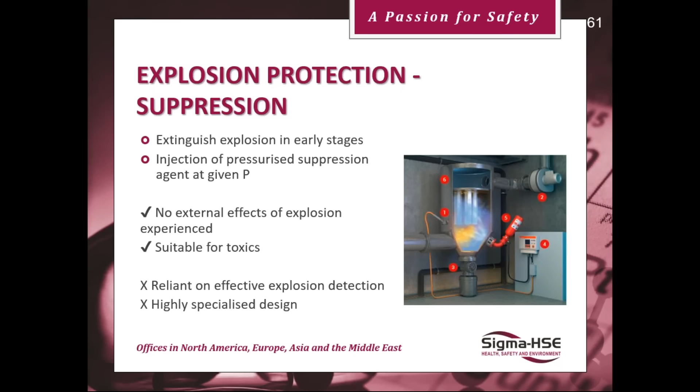Bad things: reliant on effective explosion detection, and very highly specialized design and installation. Advantages: no release of material, no restrictions on where the plant is located, no flame propagation, well-designed system incorporates isolation measures. Disadvantages: very high capital cost and maintenance costs. Only works when operational. After activation, you have to recharge the bottles again and get the system checked out. And obviously, when you've injected the inert into the system, you've lost the product.

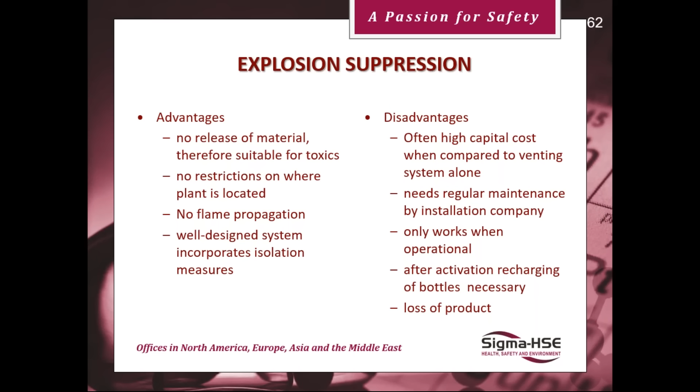A couple of examples: fluid bed dryer, dust collector. Isolation is necessary to prevent pressure piling effects and flame jet ignition. Without isolation, the explosion in secondary vessels could be more severe than what the design criteria are.

The secondary explosion is a value of twice what the initial one starts off at. So if you have 8 bar in the first vessel, you pressurize up to 2 bar, then you get 8 times 2, that's 16 bar of pressure in the second one.

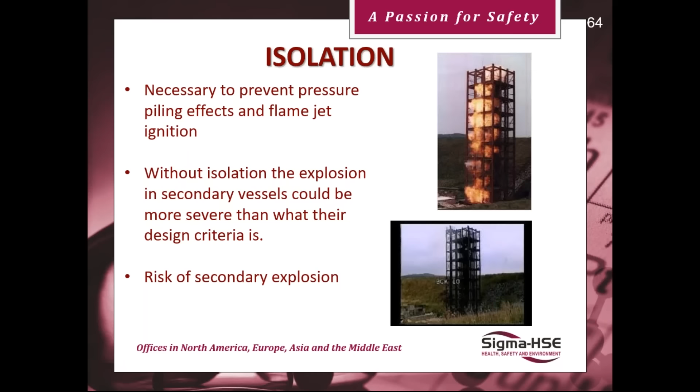Typical isolating equipment includes rotary valves and fast closing valves. The rotary valve will stop an explosion, but it won't stop fire getting around it.

So, a summary for explosion protection: determine the flammability characteristics of the materials, review the SDS, the safety data sheet, to see if the materials have other hazardous properties, and look at the hazardous area classification to identify equipment location.

The venting and suppression systems need to be designed and installed correctly, as should fire protection. For containment, the vessels need to be certified for use at the pressure, and maintenance need to be trained specifically for pressure vessels. Location may be a problem for venting, needs to be placed near an outside wall, and confirm suitable isolation is in place.

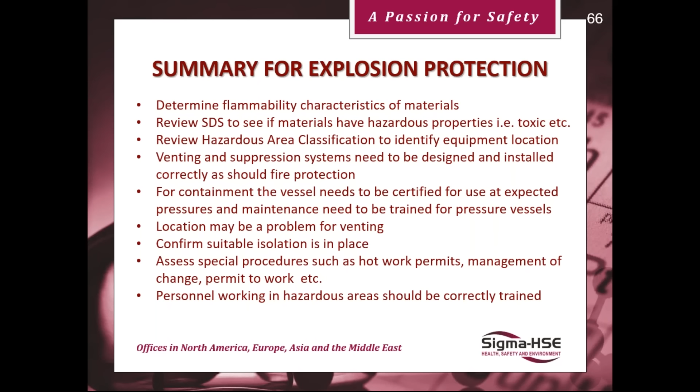Assess special procedures such as hot work, management of change, and permit to works. And again, personnel working in the hazardous areas should be correctly trained.

So, overview of the basis of safety: a combination of measures relied upon to ensure safety, highlighting the aspects of design and operation that are safety critical. Many items to consider which we've been over: equipment, procedures, deviations, human factors, material properties, and level of acceptable risk.

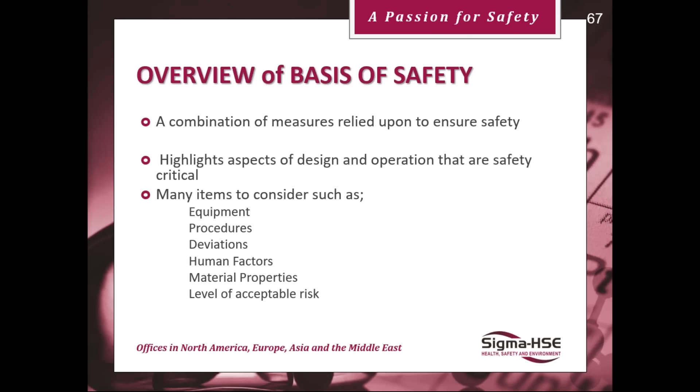For fires and explosions, there are normally 3 choices: explosion prevention, avoidance of ignition sources, and explosion protection.

Explosion prevention: several ways to achieve this, including changing the flammable material, which is not often possible, or removing the oxygen through inerting, making sure you have the LOC. Work outside the flammable range for gases and vapors, though this isn't really possible for dust as powders are not homogeneous. Maybe you could work below the MEC if possible, but always remember that if you've got an extract system below the MEC, occasionally you'll have a shot of dust above that value.

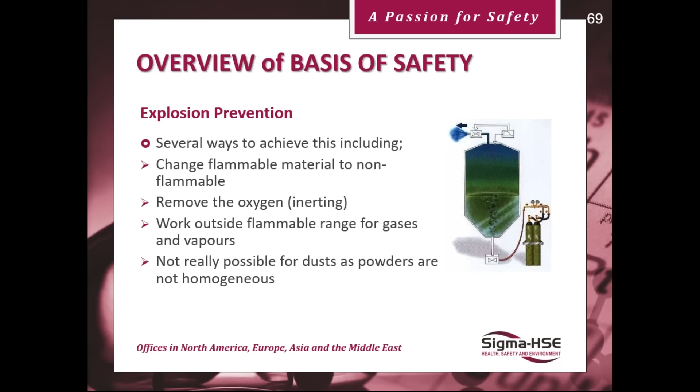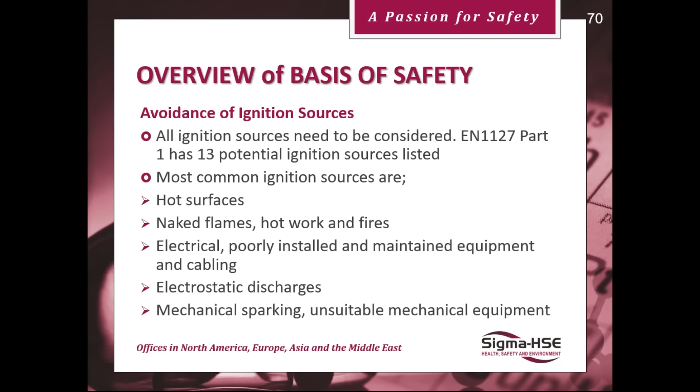Avoidance of ignition sources: we talked about the main 5, but always consider the 13 potential ignition sources as listed in EN 1127. The most common ones, as I said before: hot surfaces, naked flames, hot work and fires, electrical equipment which is poorly installed and maintained, and the cabling, electrostatic discharges due to not having good knowledge about electrostatics or how to deal with them, and mechanical sparking from unsuitable mechanical equipment being installed.

Material properties for powders and dust: you need test data such as MIE to look at electrostatic and mechanical ignition. It may also be necessary to get further electrostatic data, such as powder volume resistivity, charge relaxation time, or chargeability. How does it charge up if it's moved through certain materials? Is the material conductive, static dissipative, or insulating?

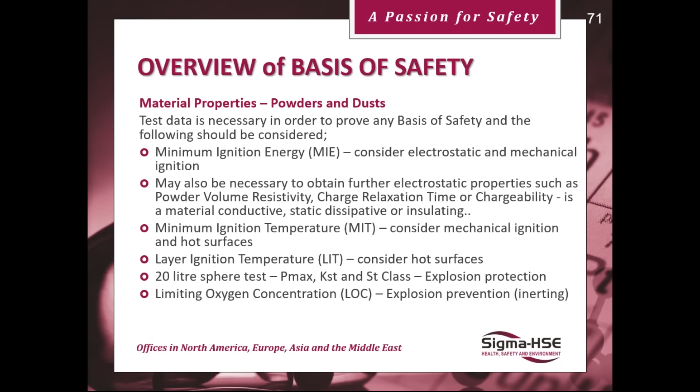Minimum ignition temperature is considered for mechanical ignition and hot surfaces. Layer ignition temperature is considered for hot surfaces. The 20-liter sphere is used when you're looking at explosion protection. Limiting oxygen concentration is for explosion prevention, and you may also need to consider the minimum explosive concentration.

So, summary of the basis of safety: hazardous area classification is your first port of call, then look at potential ignition sources. If required, you may need to do a specific electrostatic assessment, especially if MIE is seen to be low for dust or there's gases and vapors present.

The same may occur for mechanical equipment, that you may need to do a specific one for that, and one for electrical equipment as well. Look at the equipment specifications and the suitability of it for use with your material.

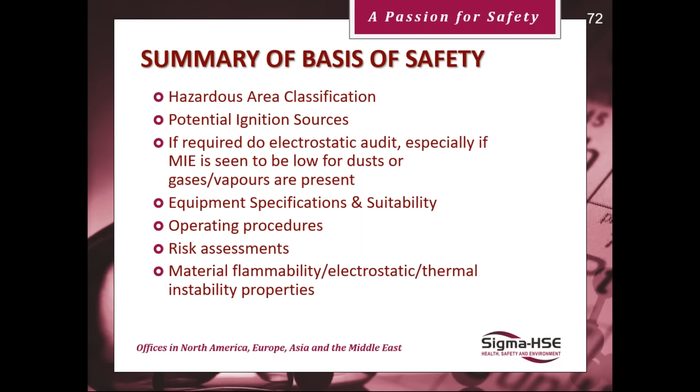Make sure your operating procedures are all correct, updated, and available. Do your risk assessments, taking into consideration everything we've talked about today. Look at material flammability, such as electrostatics and thermal instability properties.

Assess the process to understand manufacturing hazards when you're charging and discharging, mixing, etc. You need to look at each stage of the process for this, and look at the process and maintenance procedures, such as hot work permits, management of change, permit to work, etc.

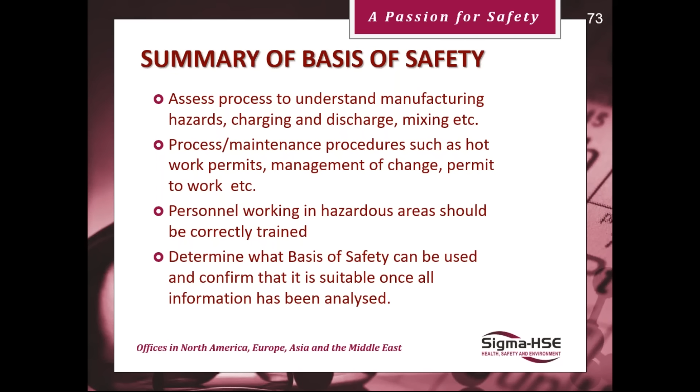Look at how maintenance handles your equipment; they should be using preventative measures to keep the equipment safe. Make sure personnel working in hazardous areas are correctly trained, determine what basis of safety can be used, and confirm that it is suitable once all information has been analysed.